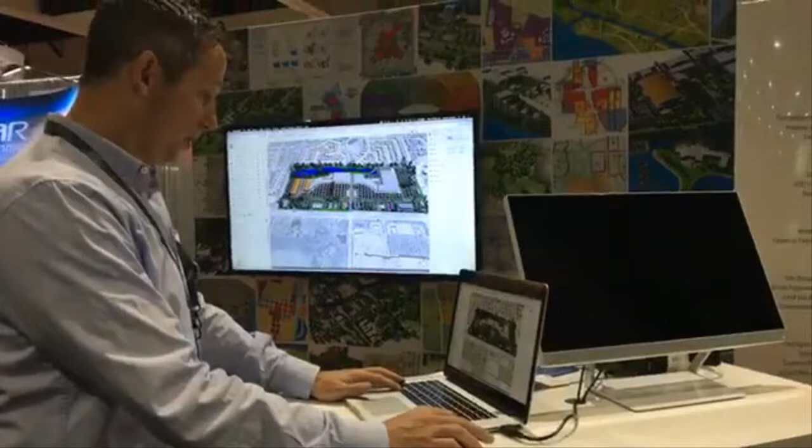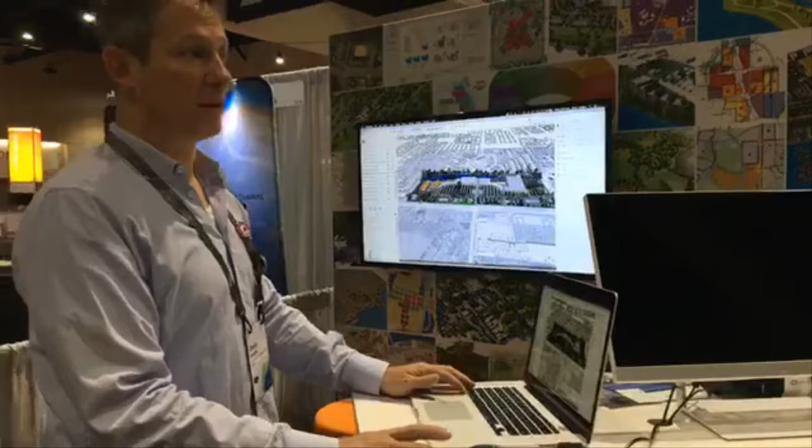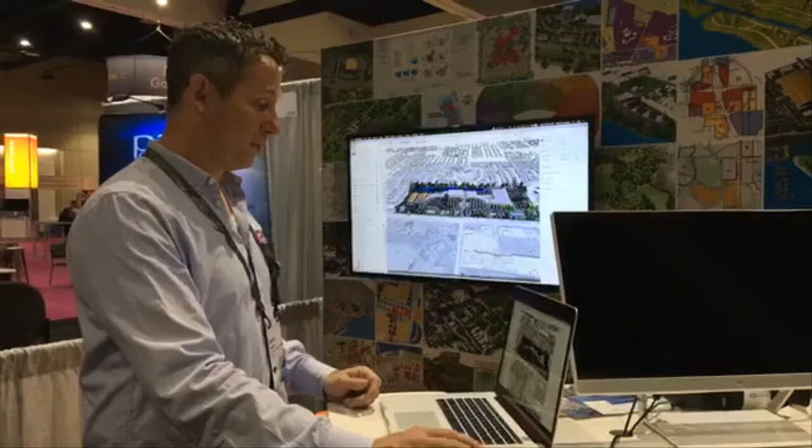So it's really great. And then some of the other ways we're using it is really to use the power of the procedural modeling inside the software to rapidly generate different development options. In the past, we might have been able to give a client one or two options. We're able to give them 5 or 6 and really edit them on the fly, sit them into a conference room, and just with the simple tools within the program, start to change things like building heights and architectural styles.

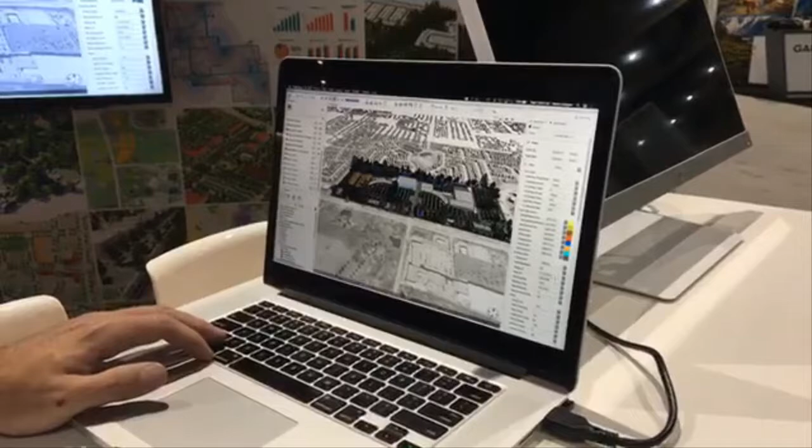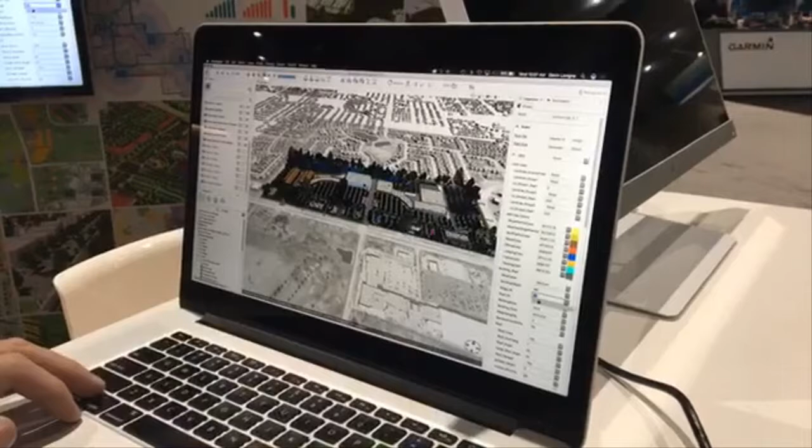So just coming in here and changing this to be... change the height. The models are going to start changing, and it's really just a great piece of software. And we've developed a lot of really cool rules that have helped us.

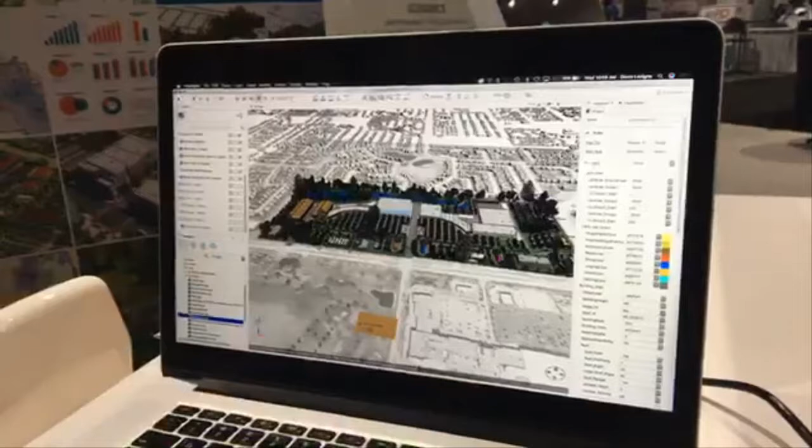Things like a detailed parking generator, where I can create a shape, and then I can go into my rule file here and just drag that onto this square and then generate a parking lot. It doesn't seem like that used to take us a lot of time to get in there and draw it out.

And then the other great thing is I can turn on the dashboard. I can see there's 2,500 parking stalls in this scene.

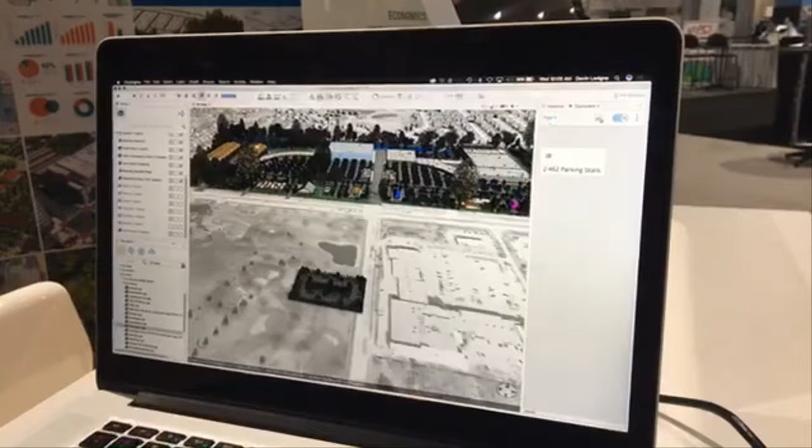And some of the different rules we've built into this one, I can change the occupancy from 40% to 60%.

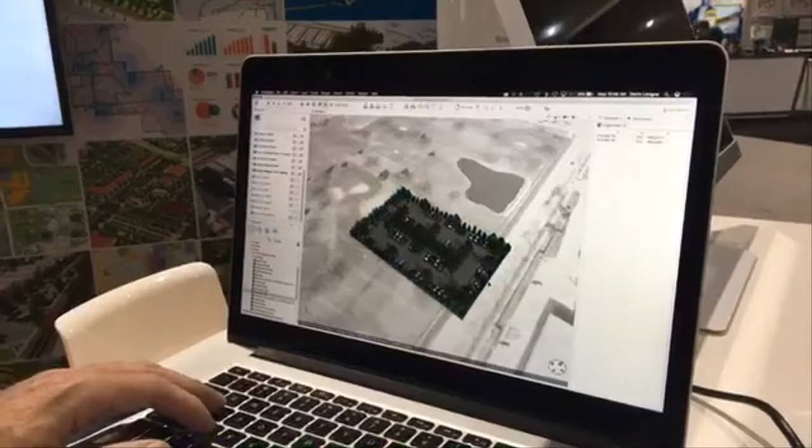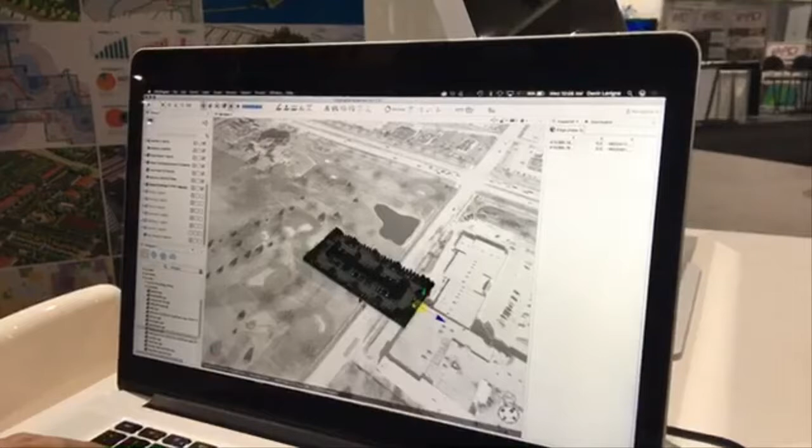And if I start changing the shape of this square, what's great about this is if I change the shape, it's going to optimize the parking stalls. So the rows are going to start to shift to maximize the parking stalls in the parking lot.

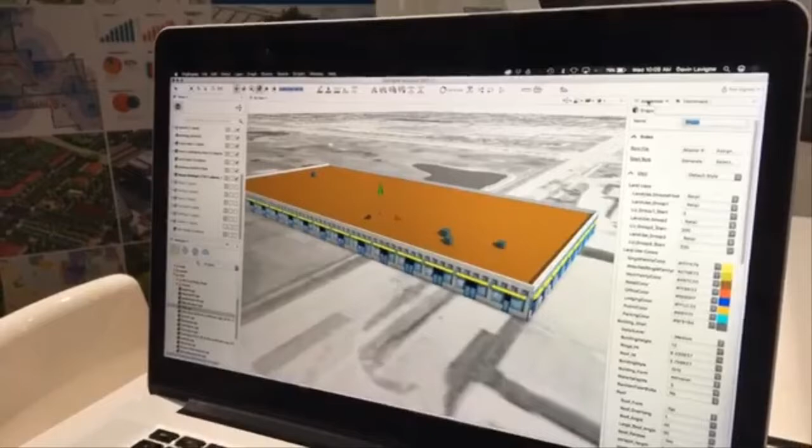If I don't want that to be a parking lot, I want that to be a building. And then from inside the inspector, a whole new set of rules comes up - what type of building, whether I've set up a predefined style, so if it's a mixed-use traditional building.

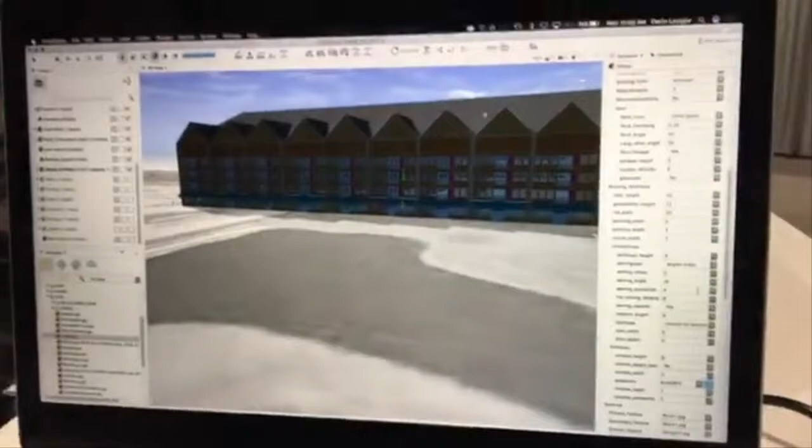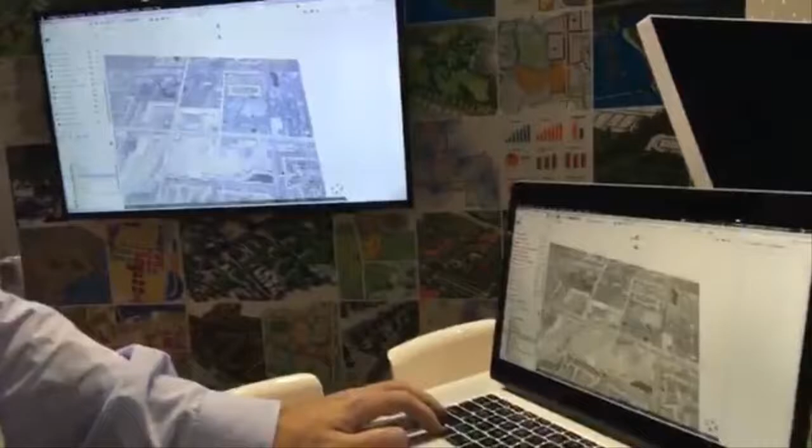Yeah, so it's really helped us quickly generate things. Something like this would have taken hours and hours and hours, and I'm able to just show you in just a couple minutes. I think the final scene, once we were done with the plan for this scene that we prepared, just a couple of hours for all of this detailed 3D work.

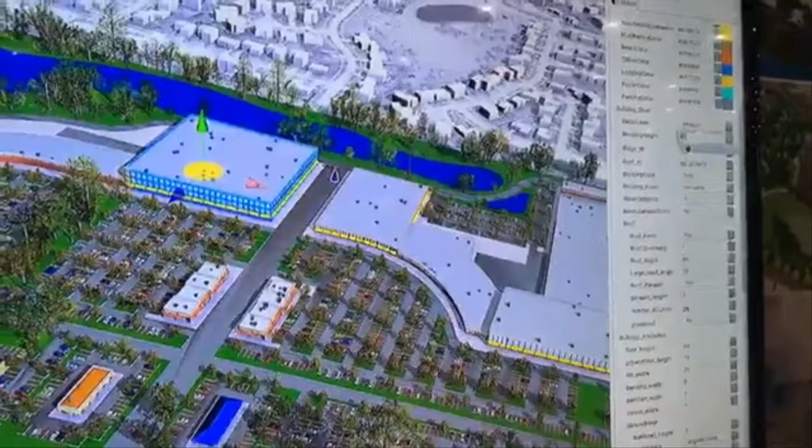Well, that's what happens when you make an 80,000 meter building.

So yeah, we're really proud to be using the software and being an Esri partner and helping you guys showcase just really all the power in it. And then with some of the new features in 2017, things like scenarios, local edits, it's really helping us even rapidly develop that many more options for our clients.

Awesome. So if anyone's joining in and you have any questions, feel free to shoot them down in the comment box. I kind of wanted to ask you, Devin, how has your workflow changed over the years, and how has CityEngine become more of an integral part of your workflow?

We started using CityEngine in 2012, and back then we just sort of dabbled in it. We were using it to develop contextual environments for our more detailed models that we were building in other 3D software. Once we realized how powerful it was, more and more time was spent in CityEngine than the other 3D tools.

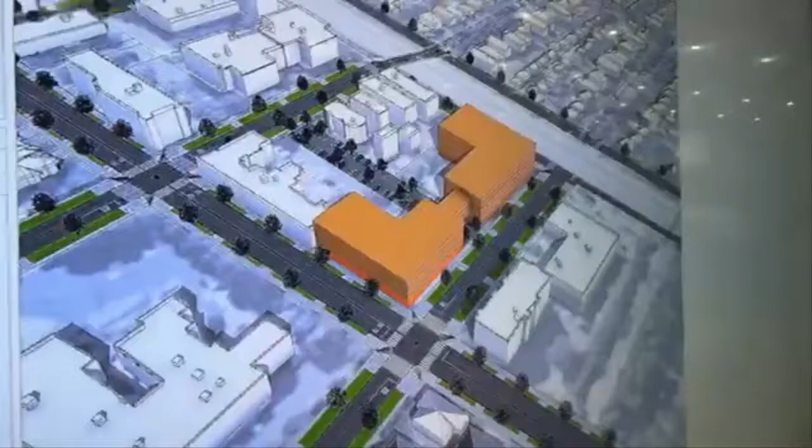Oh wait, we do have a question that just came in. This is from Chris: is there a good resource for finding City Engine rule files online?

The best resource for City Engine rule files is Esri itself—they've shared with the community a number of different examples, like a desert city, a future city, and the 3D transect of the smart code. You can download from inside City Engine all the other examples Esri has developed, import them to your workspace, and really just pillage their rule files. That's the best resource. I know we develop rule files, and there are a couple other firms out there developing rule files for specific applications. Even the new 2017 version ships with a library of rules that lets you quickly generate a lot of 3D content.